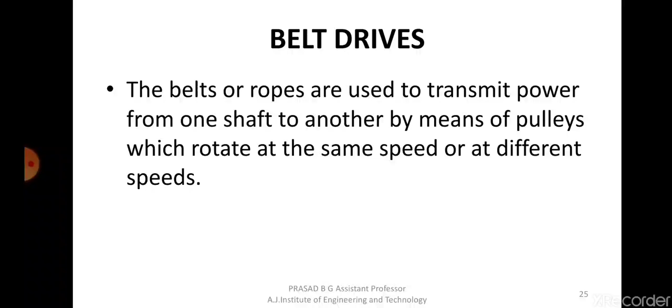So the amount of power transmitted will depend upon the following factors. The power transmission from one pulley to another will depend on these factors which I'm going to discuss. First, the velocity of the belt, the velocity at which the belt can travel. Second, the tension under which the belt is placed on the pulleys. Tension is nothing but a force on how tight the belt is placed on the pulley, and how effectively it can transmit power. Anyways, we'll see tensions in belts at a later stage, I will not explain it right now.

Next, the arc of contact between the belt and the pulley. This is another important point. We will have to do a couple of derivations on this later, so I'll again explain exactly what is meant by arc of contact. These are some factors affecting the power transmitted in the belt. Last one, the conditions under which the belt is used, which can be environmental or any physical conditions. So all these factors will determine the amount of power that is transmitted in case of belt.

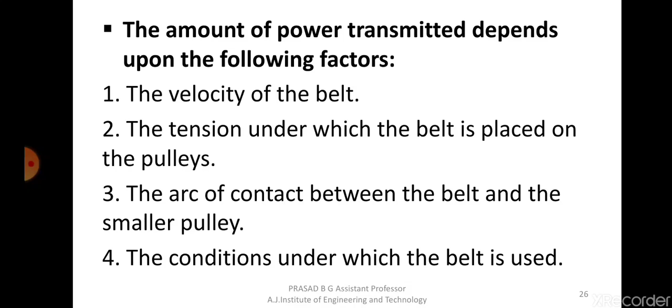So next, selection of the belt drive. In the previous case, we covered the factors that are affecting the power transmission.

In this case, what you are saying is criteria to select a particular belt. What are the things to be considered while selecting the belt? First one is speed of the driving shaft and the driven shaft. What should be the speed of driving shaft and what should be the speed of the driven shaft? Based on that speed we need to consider.

Second one, speed reduction ratio. What should be the variation in speed required? As I told you, the speed can be different from input as well as output depending upon the size of the pulley. So if the power requirement is so and so, how to select a belt? Power to be transmitted. How much power is to be transmitted?

Next one, center distance between the shafts. That is from the driving pulley to the driven pulley. If you take the center of the driver and center of the driven, that point center to center distance is called as center distance between the shafts. So how far the pulleys are, driver and driven pulley. Next one, positive drive requirements, then shafts layout, space, how much space is available, and other service conditions. So these are the criteria that we need to consider for selecting a belt drive.

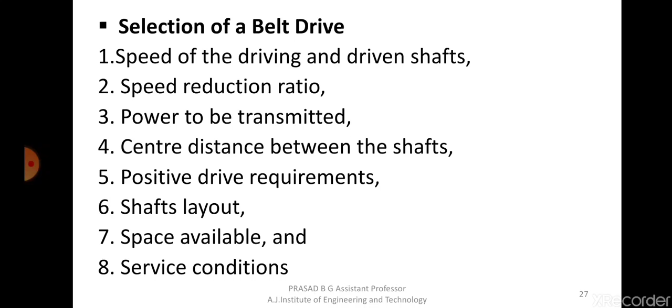Next one is type of belt drives. Depending upon the speeds at which the belts are used or the power is transmitted, the belt drives are classified into three types. They are called light drives, medium drives and heavy drives.

So what do you mean by light drives? Light drives means these are used to transmit power at a speed about 10 meters per second. The power transmission speeds are about 10 meters per second, and it is generally used in agricultural machines and some smaller machine tools. So where the speed is generally less, we are using something called light drives.

Second one is medium drives. These are used to transmit powers with belt speeds over 10 meters per second but within 22 meters per second. That means the speed is slightly higher than the first case, but it will be between 10 meters per second to 22 meters per second, and they are most commonly used in machine tools, that is in the machines.

Third one, heavy drives. These are used to transmit large power at belt speeds greater than 22 meters per second. These are considered as high speed machines in which belt drives are used, usually used in machinery like compressors and generators, where the speeds are usually high. So these are the types of belt drives that are used.

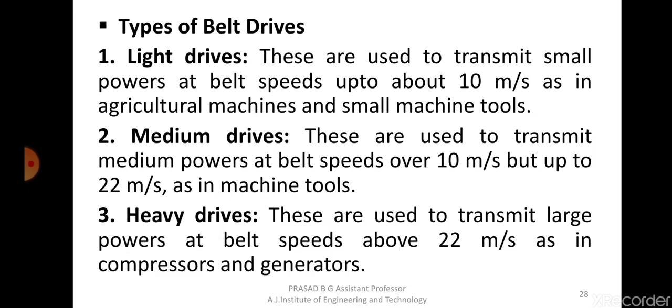Next one is based on the shape of belt. Belts are again classified based on different shapes. There are three major shapes of the belt. First one is called flat belt, second one is called V belt, and third one is called circular belt, or we call it rope. Okay, so you can see the sketch here.

So first one is a flat belt. This will be the part of the pulley, and this is just a representation. This will be the thickness of the belt, so we are talking about the cross section of the belt here. If you see the flat belt drive, it will generally have a rectangular or square cross section. They will have uniform thickness throughout from top to bottom, and they will be having either rectangular or square section. This is the most common type of belt that is used.

So second one what we have is called V belt. In case of V belt, as you could see in the sketch here, their cross section will usually have a tapered section on either side. It will not have a complete rectangular or square section. The belts will have taper on the side like a V. That's why it is called V belt.

Now why are V belts used? V belts are specifically used for transmitting more power. They have more power transmission capability compared to flat belt drives, and there won't be much slip also. Compared to flat belt drive, V belt will have more efficiency.

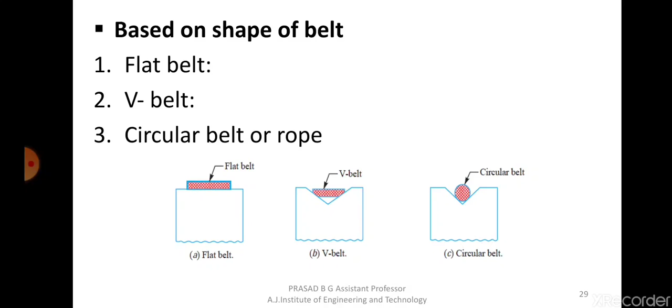Okay, so next we will have to consider the materials used for belt. The most common material used for belt, if you generally remember seeing belts anywhere, is either leather or rubber. The different materials used for belts are: leather belts, cotton or fabric belts, rubber belts, and one more material called balata, which is also a form of rubber. So four materials are used in case of making these belts.

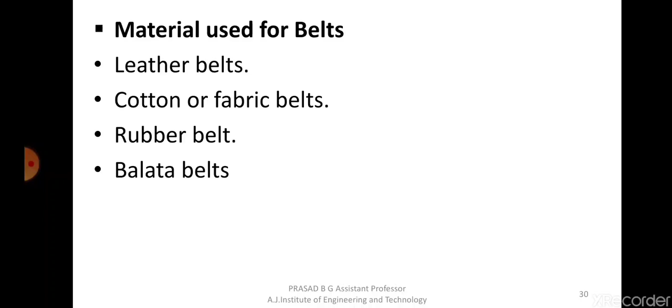Okay, so this is now important. Types of belt drives, types of flat belt drives. There are two types of flat belt drives. One is called open belt drive, and the other one is called crossed belt drive, or it is also called twist belt drive. So open belt drive and cross belt drive, there are two derivations to be studied where you have to find the length of the belt.

Okay, so this derivation is to find the length of the belt. For example, if there is a pulley over here and the driven pulley is at a certain distance, and the power has to be transmitted from this pulley to the other one, then what should be the total length of the belt that is required? The length of the belt should be very accurately calculated. It cannot be too loose or too tight, right?

So you should know the exact amount of length required to complete that belt drive. So if in case of open belt system, what should be the length, and in case of cross belt drive, what should be the length? We have to get a formula based on the center distance between the pulleys, and also the diameter of the pulleys. Based on that, you have to find out the length, in the case of open belt drive as well as cross belt drive.

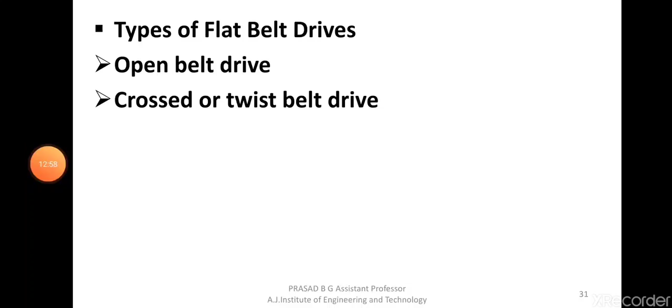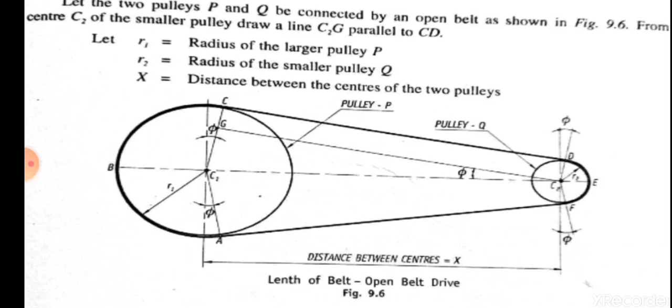Got it? So what am I supposed to do? I need to somehow find a relation between ABC, C to D, DEF, and F to A, and then add it up to get a final expression. So now, to begin with this, let us tell you what are the things.

Let the two pulleys be P and Q, one larger and one smaller, connected by an open belt drive as shown in the figure.

From the center C2 of the smaller pulley, we'll get to that later. First let me explain the things shown in this figure.

Let us consider R1 as the radius of the larger pulley, and R2 as the radius of the smaller pulley.

So the larger pulley is this one. Let me take this radius as R1 and this smaller radius as R2. The center distance means the distance from the center of this pulley to the center of the other pulley, so let's take this distance between the centers as X.

So there are two pulleys, one larger and one smaller. I am taking the radius of the larger pulley as R1, the radius of the smaller pulley as R2, and the distance between the centers of the two pulleys as X.

This is required for later stages because we cannot always say radius of this, radius of that. So R1 is the radius of the larger pulley, R2 is the radius of the smaller pulley, and X is the distance between the centers.

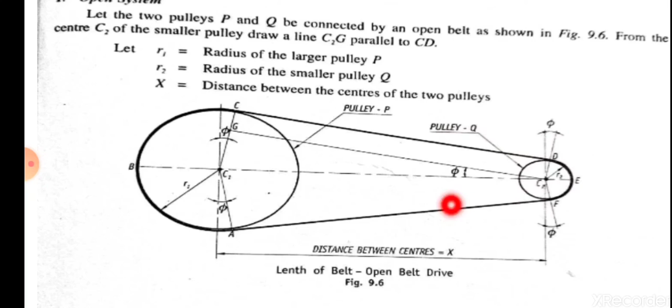Arc length BC, CD and DE will also be equal to EF plus FA plus AB. So what I will do is, I will just try to get this distance BC, CD and DE and multiply that by 2 so that I get the overall length.

As we proceed with this derivation, it would have been much better if we could do it step by step in the classroom itself, but now we have to concentrate a little more and understand this part.

It is always better when we have a live session and I can draw this sketch and immediately explain point by point, step by step. It would be easier, but anyways this derivation is given in the notes we have given you.

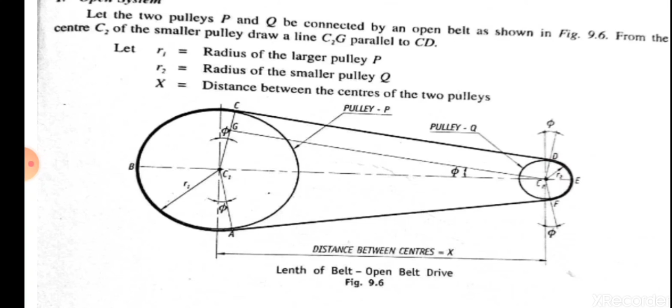So anyways, I will just go through it now step by step.

Going into the next part, from the geometry of the belt drive, as I told you, I have explained it first itself, because if I just mentioned this point now and then went there, you may get confused.

So now you already know, from the geometry of the belt, the length of the belt will be equal to arc length ABC. Please recall what I explained that time.

Arc length ABC plus length CD plus arc length DEF, that is the arc of contact of the smaller pulley, plus length FA. That will be the total length of the belt, isn't it? So I'm just telling you the first point here.

Total length of the belt will be equal to arc length ABC plus length CD on the top side, then arc length DEF plus length FA. That is the total length of the belt.

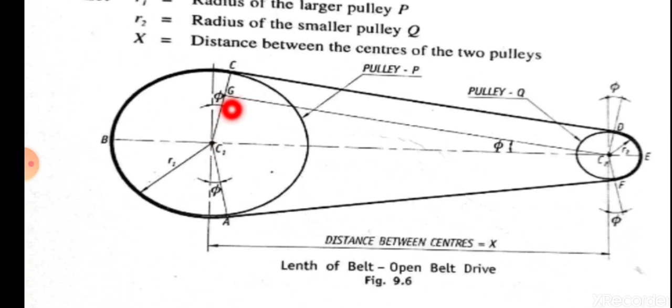Going back here, I am writing the same thing. Arc length BC is equal to pi by 2 plus phi into R1. We are taking the trigonometry into consideration. Arc length BC will be equal to pi by 2 plus phi into radius. S is equal to R into theta, so R is nothing but R1 in this case, the radius of the pulley, and theta is equal to pi by 2 plus phi.

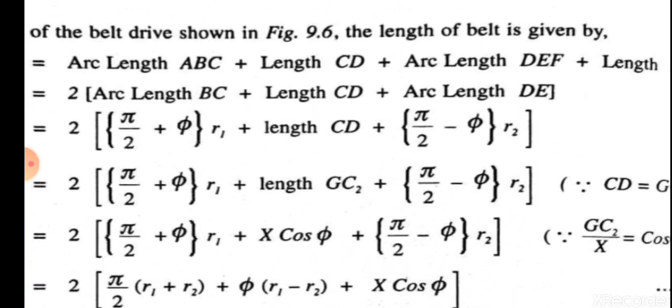Length CD I will keep as it is. When you go to the right hand side, to the smaller pulley, again we use the same concept, S equals R theta. But there, if you observe, the arc of contact will not start from the left side, it starts from the right. I'll just go back again here.

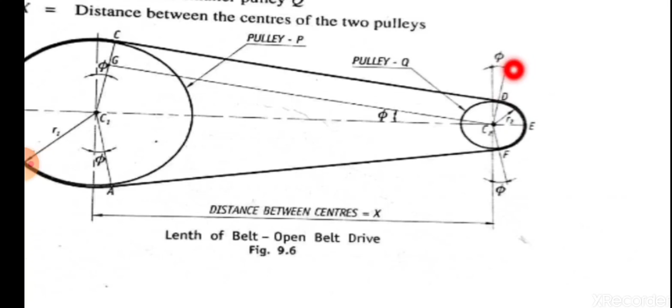If we look at this portion, I will have to deduct phi from there, because from the center the line is over here, but the point of contact happens from D. I have already included length CD separately, so I need this DE only. This distance is taken as phi, but I don't want this phi because it starts from D, so the total is pi by 2, and this distance is phi. So it will be pi by 2 minus phi into r2.

That's what I've written here: pi by 2 minus phi into r2. When you consider the left hand side arc length BC, the total arc covered is pi by 2 plus phi. On the right hand side it is pi by 2 minus phi into r2.

Now one more thing in the next line, it is the same: 2 into pi by 2 plus phi into r1 plus length CD is equal to GC2. Now what is GC2? It's a construction that we have done.

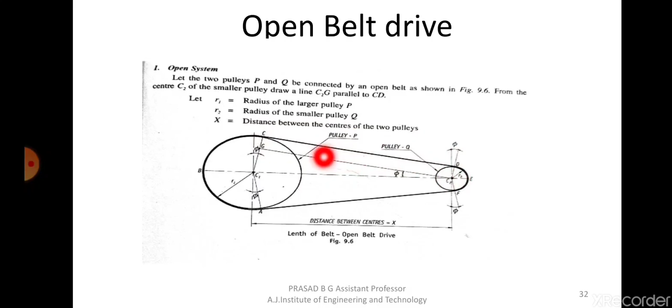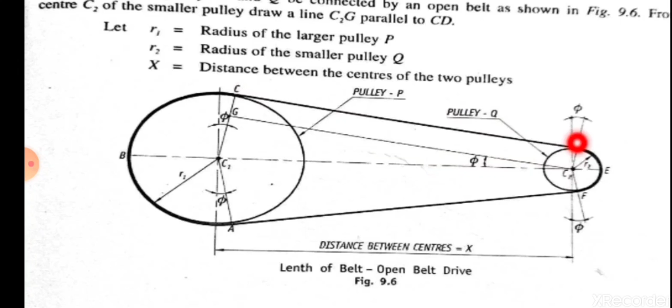GC2 is nothing but a line we have drawn parallel to CD from the center to this point. It's just done for us to get the value of the length GC2. CD is projected to this point, and if I'm drawing a line absolutely parallel to this, it will be the same. So GC2 will be equal to CD. I am writing, instead of length CD, it as GC2.

So 2 into pi by 2 plus phi into R1 plus length GC2 plus pi by 2 minus phi into R2. Next step, we write it as pi by 2 plus phi into R1, which will remain as it is. Now I have to get the value for GC2.

Now GC2, from the sketch, forms a triangle there, and that will be equal to x cos phi, or in other words, we are taking the cos theta function there. If you take the length GC2 from the triangle which is formed, it becomes x cos phi. X is the center distance, and cos theta is equal to adjacent by hypotenuse, so I'm taking the same distance. GC2 will be x into cos phi.

GC2 by x is equal to cos phi as per trigonometry, since cos theta is equal to adjacent by hypotenuse. That's why GC2 becomes x into cos phi. Then we are just rearranging that equation and simplifying it.

We get 2 into pi by 2 into r1 plus r2 plus phi into r1 minus r2 plus x cos phi. X cos phi will be as it is; we have just multiplied this term here. Pi by 2 into r1, we have pi by 2 into r2, so I am taking that together as pi by 2 into r1 plus r2. Similarly, I have phi into r1 minus phi into r2, so I am taking phi into r1 minus r2, plus x cos phi.

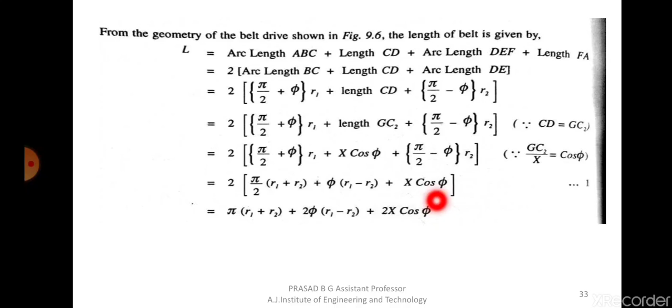Now I have to replace the same in the case of cos phi. So 2x will remain as it is. In place of cos phi, I am writing it as 1 minus r1 minus r2 square divided by 2x square. I am just using this formula and putting it here. So this is r1 minus r2 square divided by 2x square, because we have this whole square, right? So I have taken r1 minus r2 square, and x square multiplied by 2 becomes 2x square.

Now if we simplify this, in the next line we get it as pi into r1 plus r2 as it is. So we have r1 minus r2, again r1 minus r2, so that will become plus 2 into r1 minus r2 square by x, plus 2x as it is. We are multiplying that, so 2x into 1 is 2x. So minus - when you take 2x, 2x will get cancelled here, 2 and 2 will get cancelled here, x and x square get cancelled here. So what is left out is r1 minus r2 square by x.

So if I just rearrange that and write the final expression, it will be: L is equal to pi into r1 plus r2, plus 2x as it is. Here we have 2 into r1 minus r2 square by x. Here we have r1 minus r2 square by x. So 2 into this one, minus this one, 1 will cancel. So what is left out is r1 minus r2 square by x.

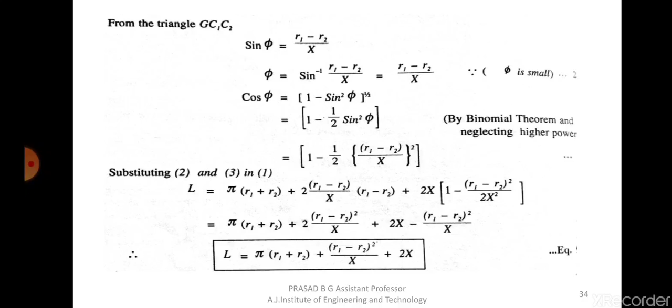So you will be given a question where they may give you the radius of the larger pulley and smaller pulley, and ask you to find the length of the belt, or they may give you the length of the belt and some unknowns - but you will need this expression to get the answer. So please make sure you go through this derivation and study it properly.

Okay, so next you have cross belt drive. I've already explained what you mean by cross belt drive, right? Cross belt drive is usually used to get the direction opposite to that of the driver. So if the driver pulley is rotating clockwise, and you want anti-clockwise direction in the driven pulley, then you will go for cross belt drive. You can see how the belt is connected.

Now what I am going to do is give you this as an assignment. There is a derivation for this cross belt drive also - you will have to find the expression for the overall length of the cross belt drive, which is absolutely in line with the open belt drive. I have already done the open belt drive derivation, so I want you to do the cross belt drive derivation and submit it to me.

So that will be your assignment for the day. I'll just go through this anyhow, but this is what you have to do and submit. You have to draw the sketch first and explain all those things.

Nothing is changed if you have heard the explanation clearly with respect to open belt drive, this is almost the same. Even the final expression, there is only one small change you are going to get. This is the larger pulley having radius R1, this is the smaller pulley having radius R2. The distance between the centers remains the same, x.

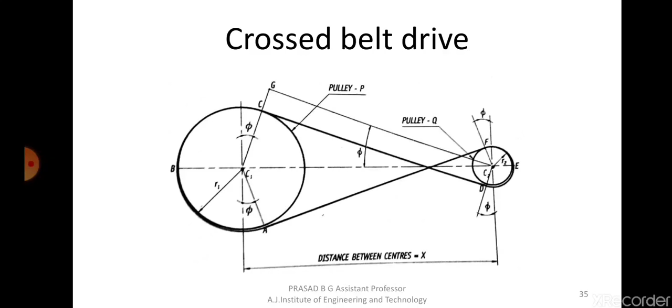So anyways, if you just go through this: P and Q are connected by a cross belt as shown in the figure. C2 is the center of the smaller pulley. Again the same concept, you are drawing C2G line parallel to CD so that you can get the value of that in terms of x and phi.

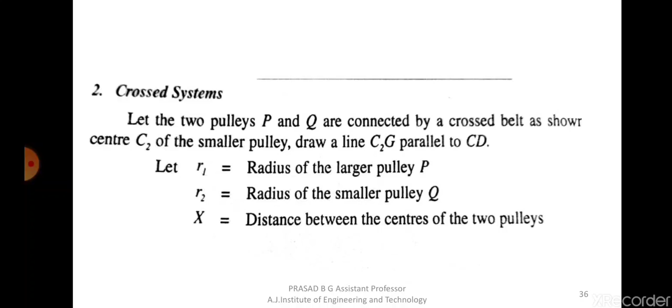You can see the first part will remain the same: arc length ABC plus length CD plus DEF plus FA. So we are taking only the half portion of that. Based on that only you are taking pi by 2 plus arc length CD.

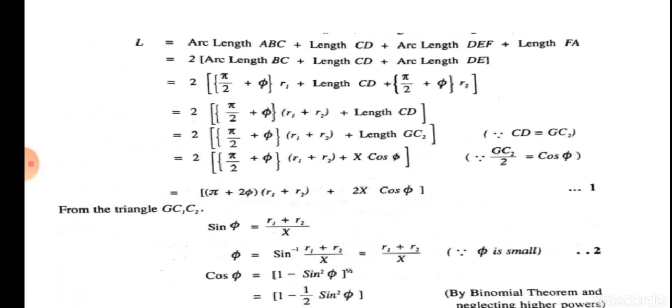And in this case, one small change, if you could observe here, this is what I wanted to say. In open belt drive, I told you that for the smaller pulley, when considering the arc length, it was pi by 2 minus phi. But in this case, it is not pi by 2 minus phi, it is also pi by 2 plus phi only.

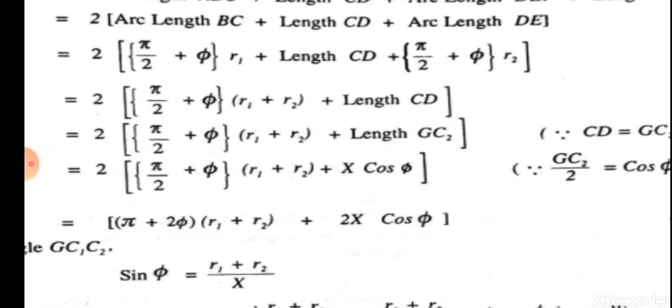Because if you see the sketch, you would realize that the arc of contact will be here, right? So phi will come in case of open belt drive, where the belt was coming here and touching here after the point. But here if you observe, the belt comes in contact before itself at this point F, so when you take the arc length EF, it should be pi by 2 plus phi.

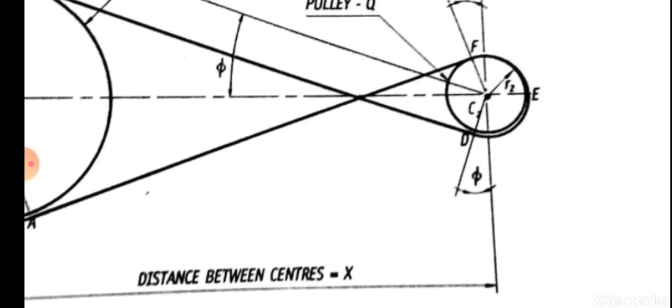That is one change in the entire derivation you need to know. In open belt drive, since the arc was passing through like this, the F point would have been here, so you take pi by 2 minus phi. In this case, since it is cross belt drive going like this, the arc of contact would touch before itself, so the total arc will be pi by 2 plus phi. So in both cases it is pi by 2 plus phi, pi by 2 plus phi. That is the only change you have to note.

And based on that derivation, you will have to do this under the same lines. And then the final expression, if you observe, what is the change? It becomes pi into R1 plus R2, plus R1 plus R2 squared divided by x.

In case of an open belt drive, it was R1 minus R2 squared by x, plus 2x. So pi into r1 plus r2 is the same, plus 2x is the same. In between you will have r1 plus r2 squared, whereas there it was r1 minus r2 squared. So that will be the change.

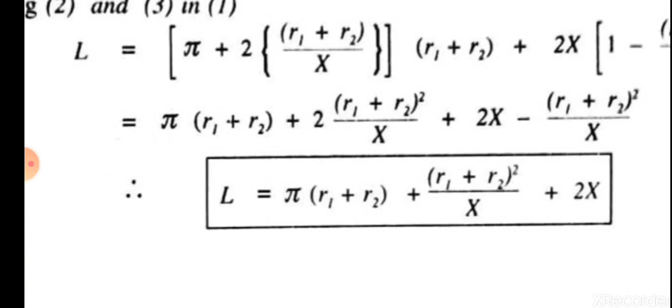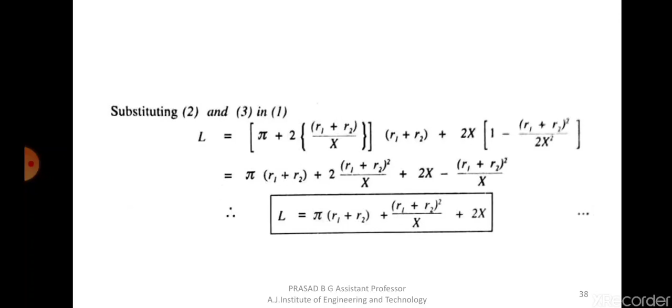So we will continue. There's still a lot of portions left in this, in belt drives. We have only finished the derivations for open belt drive and cross belt drive.